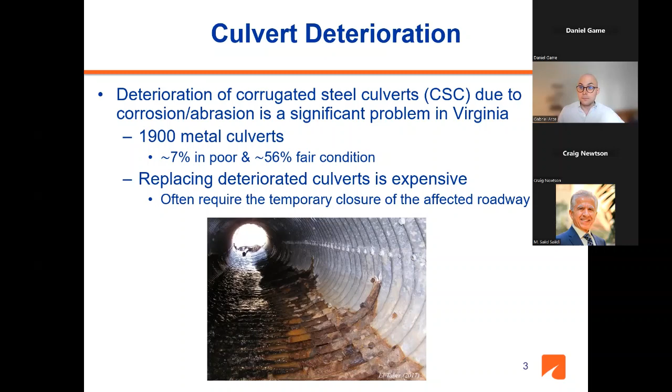This deterioration usually occurs because of corrosion of these culverts. These culverts are usually made out of galvanized steel, which gives some corrosion resistance. Nonetheless, over time, with the water, they corrode, and also because of the abrasion of not just the water, but all particles that go in this water, like gravel. If you want to replace these culverts, it's fairly expensive and often requires temporary closure of the affected roadway. This is a very significant problem for us here in Virginia, and very likely in many other states in the United States.

So how does this deterioration occur? At early stages, only limited damage occurs at the invert of the culvert. The invert is the bottom portion of the culvert, and that's the area where the water is always flowing, so it's more susceptible to damage. This is an image of one of the culverts here in Virginia with some minor deterioration of that bottom portion of the invert. Here you can see a zoomed-in picture of this deterioration. As you can see, you start losing a little bit of the surface of these culverts.

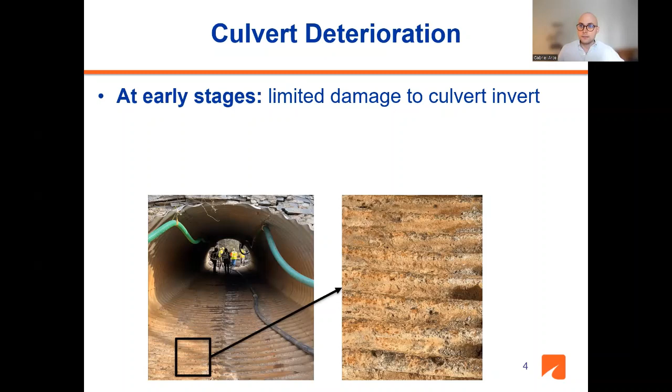Next, at later stages, if nothing is done, extensive damage can occur. This image is from research done by Peter and Moore, showing a culvert that was extracted from the field and then rotated so you could appreciate all that damage. As you can see, you have wall loss and perforations that occur, and the structural capacity of this culvert is significantly affected. So if we do not repair these culvert inverts, this damage can extend and can be very problematic.

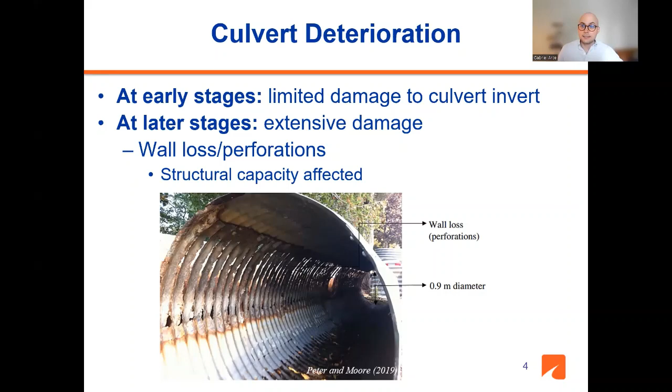Now regarding culvert invert repair: at early stages of deterioration, only minor damage of the invert occurs, so restorative maintenance at this point is possible and appropriate, to protect that invert from further corrosion and abrasion damage. At VDOT, some repairs were previously done, which consisted of pouring or paving that invert with a 4-inch thick layer of concrete reinforced with wire mesh. The 4-inch thickness and the wire mesh were used so that cracking could be prevented.

Because of course, if you have an invert repair with a concrete material that cracks, water can continue to flow through those cracks and then be in contact with the existing steel culvert and continue the corrosion, the rapid corrosion deterioration.

Now, the problem with this is that this is a very thick repair, these 4 inches, and that adversely affects the water flow capacity of this culvert. So this is not an optimum solution.

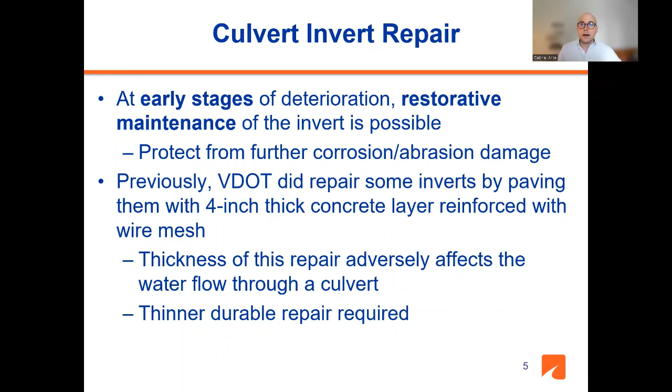Ultimately, what is necessary is a thinner, more durable repair for these inverts. Whenever we have more than just minor invert deterioration, but a more significant deterioration that requires structural repair, one interesting option for structural rehabilitation is the use of spray-applied pipe liners. These are rapid and cost-effective solutions using a cementitious mortar, usually fiber reinforced, that is centrifugally sprayed.

As you can see in this image, this is the culvert. You have the host metallic pipe, and you use this spinning head. You pump the concrete to that spinning head, and due to the rotation and centrifugal forces, the material is expelled to the surface of the host pipe, building a cementitious pipe inside of it. Usually a thickness of around 2 inches is used for these repairs.

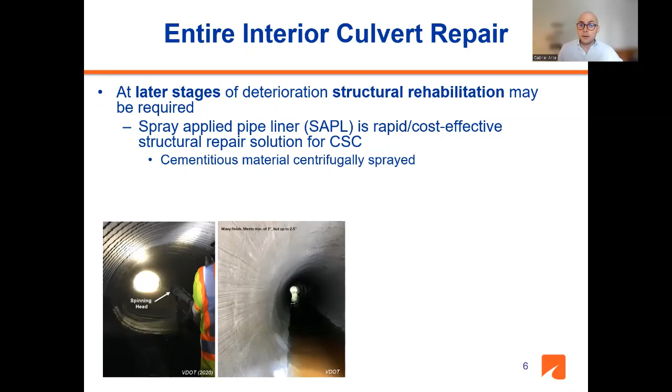This is an image of the repair being completed. And finally, this is another image of multiple culverts that were repaired using this technique.

This is me. I'm so sorry. Yeah, excuse me? Okay, so I'll continue.

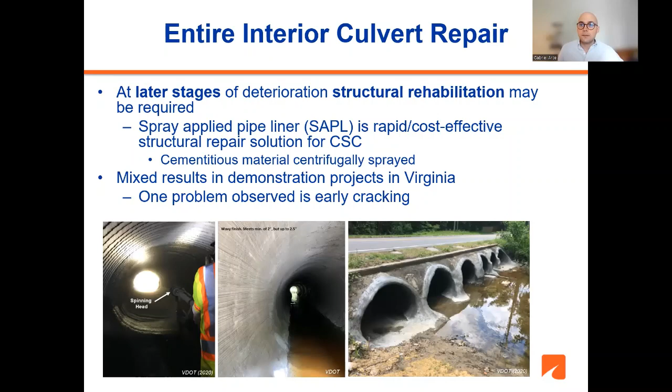This is a structural rehabilitation, so if you have cracking, it really matters what type of concrete you have there, what type of behavior this concrete has, because you need to hold that load carrying capacity. I'm going to talk more about that in the next slides, and why ECC, either for the invert repair or the entire culvert repair, is a very interesting solution.

So, okay, let's start with ECC for culvert repair and why we believe this is a very interesting solution.

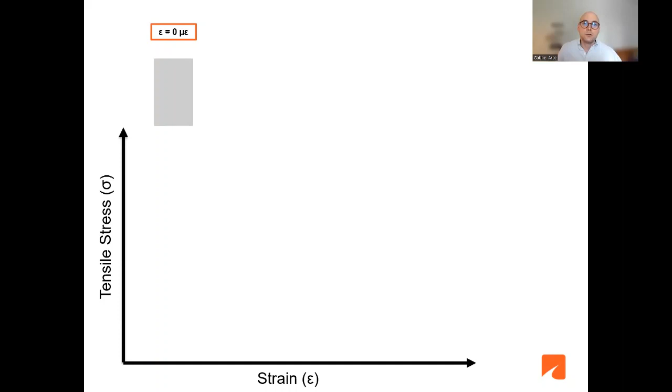You continue deforming the material - at 25 microstrain, the stress response is about 100 psi. You continue until suddenly, when you reach about 100 microstrain, which would produce about 400 psi of tensile stress in the concrete, the conventional concrete would crack.

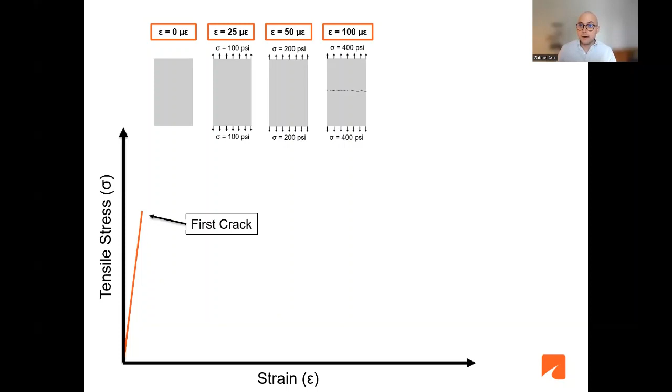Now, the question is, what happens after this crack? If it is a conventional concrete material without any fiber reinforcement, what is going to happen is a brittle, immediate failure of this material. Again, imagine the culvert repair, this structural repair - if the concrete material does not have any fibers and you have a crack, you know that concrete can no longer hold the load. This could be very problematic if the host metallic pipe further deteriorates to a point where the concrete material actually has to hold the load.

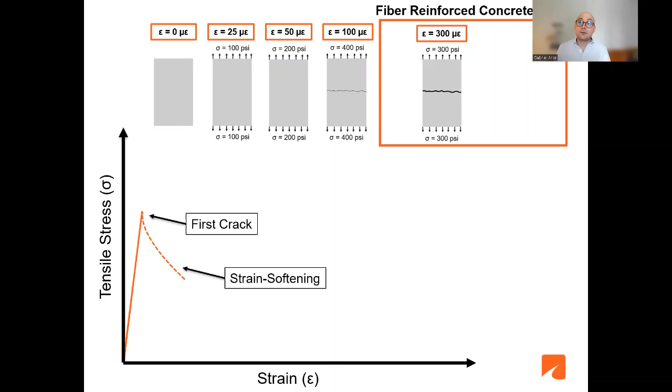Next, let's see what happens when we have fiber reinforced concrete. If we have a conventional fiber reinforced concrete, after this first crack, you're going to have a strain softening behavior, meaning that after that first crack, you have a residual load carrying capacity. Nonetheless, this capacity is lower than the original concrete material prior to cracking. If you continue deforming these materials, the load will continue to go down, and that crack will continue to open until finally you have a complete rupture of the material, a complete failure. It's important to notice that similar to conventional concrete, this fiber reinforced concrete, after the first crack, is already in a failure regime.

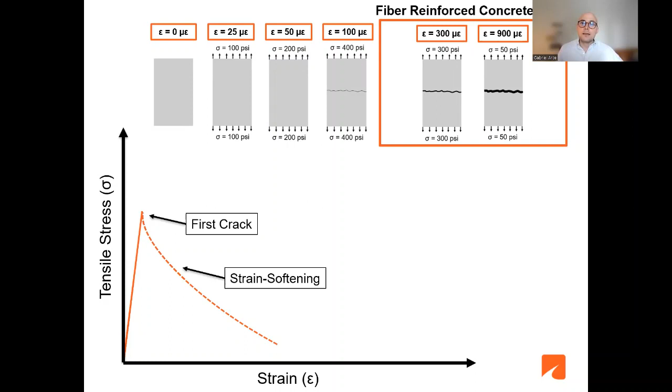That's why I have this as a plot with a dashed line. Now, interestingly, the ECC, engineered cementitious composite, behaves rather differently.

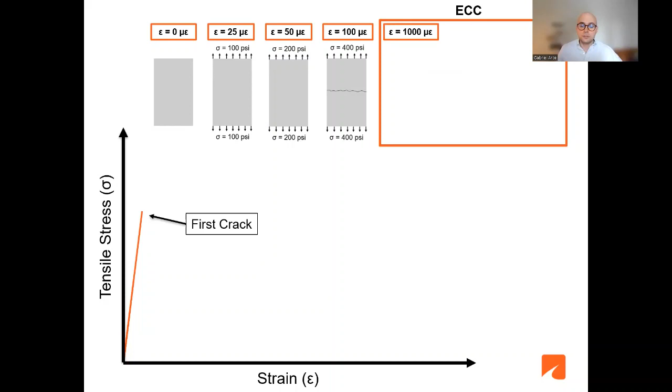So how does the ECC behave? After that first crack, you continue deforming the material, and you actually have a phenomenon called pseudo-strain hardening, meaning your material can hold more load after the crack.

How does this mechanism occur? It occurs through this process of multiple crack formation. This strain hardening is called pseudo-strain hardening, to be differentiated with the strain hardening observed in metals, which is based on the dislocation of atoms.

This strain hardening in this cementitious system occurs because of this phenomenon of multiple tight microcracks forming that allow this material to deform. It's important to mention that these cracks are very tight, and that's important for durability. Sometimes you can barely see these cracks with your eyes.

Now, interestingly, you continue deforming this ECC, and it continues producing more tiny cracks, and the load capacity continues to increase. Eventually, you reach a point in which the material fails. One of these multiple cracks will grow, and the material will fail, similar to a conventional fiber reinforced concrete.

But again, imagine the repair that we were talking about in the field for these culverts. If you have an ECC material, this is a very resilient repair, because even if you have some type of cracking, you know that these cracks are stronger than your original material prior to cracking, and it will be able to hold the load. So it's a very resilient system.

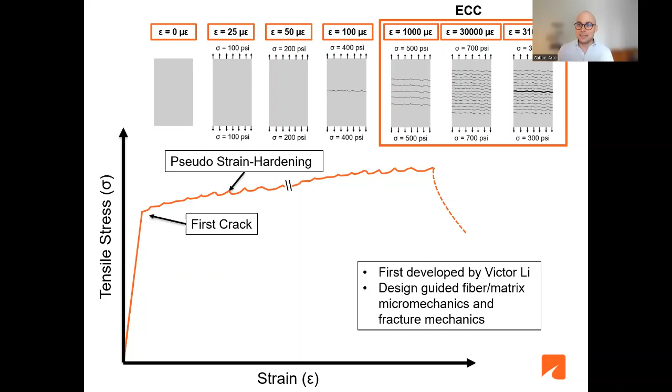These are very, very interesting systems. And I would like to go even more deep in the explanation of these concepts, but I think it's beyond the scope of this presentation today.

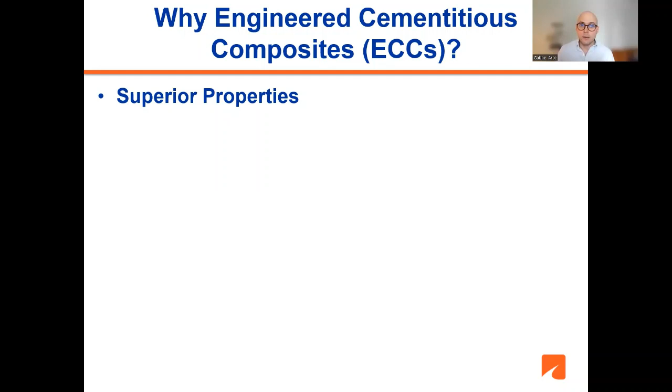How much is the ductility in tension? Usually about 200 to 800 times more than that of conventional fiber reinforced concrete, and about 5 to 20 times more tensile ductility than UHPC, which is a very popular material being used in repairs recently. Also, it has unmatched crack controllability.

Cracks in ECC are steady state controlled to usually less than 60 microns. Why is this very important? Because this allows these cracks to be self-healing.

Concrete has autogenous healing properties. However, these autogenous healing capabilities are usually effective only with tiny, tiny cracks. This range of crack size is appropriate for this healing. It has also been demonstrated through research that cracks around 50 to 100 microns do not increase the permeability of the cementitious system. So, in short, these cracks in ECC are not a problem for durability.

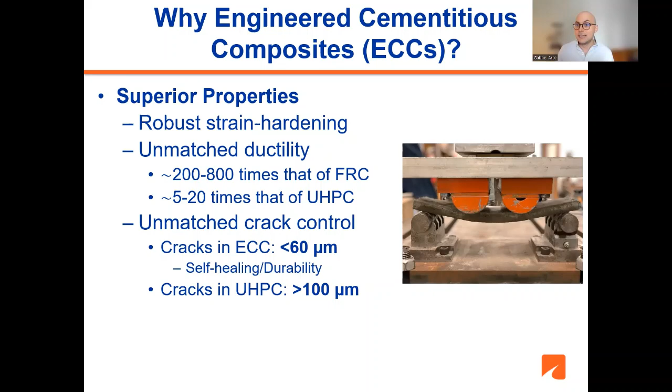Also, for context, cracks in UHPC, for instance, are usually greater than 100 microns. And in that case, if you have a UHPC with this type of cracking, you can actually increase the permeability of the system.

This is an image just to illustrate multiple cracking behavior in ECC. This is a section of one specimen that was tested in tension, 3 inch by 1 inch to give a sense of scale. And this is at failure. You can see all those cracks, how tight they are held together.

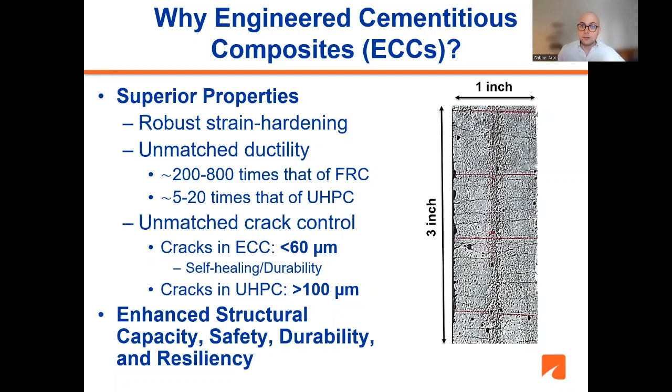So it's very interesting, this ECC material with regards to crack control. And ultimately, all this leads to an enhanced structural capacity, safety, durability, and resiliency of the systems that you repair with ECC. Now let's talk about the application of ECC for the culvert invert repair.

As I was mentioning in the beginning, when the deterioration is not that advanced, you can repair the invert in a restorative manner to prevent further deterioration. Previous work by Ozyildirim and Sharifi, colleagues of mine at VTRC, focused on the repair of only the invert with ECC. There's a technical report, VTRC 21-R5, which you can access online on the VTRC web page, and you can get all the details about this successful project.

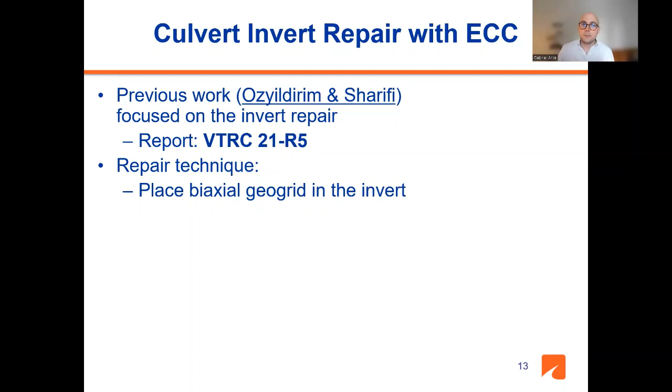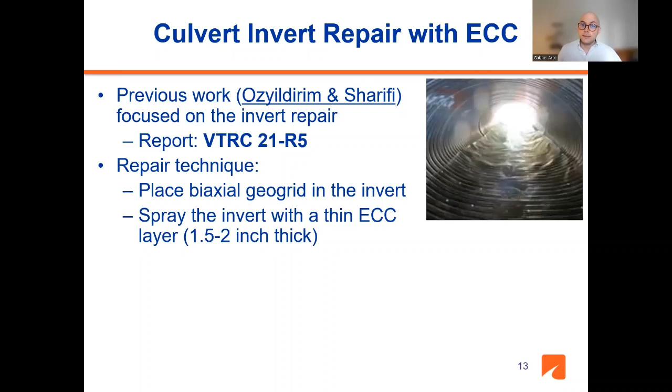In summary, what they developed is a repair technique for culvert inverts, where they started by placing a biaxial geogrid in the invert of the culvert. The purpose of this geogrid was first to allow the material to stay in place - the ECC is usually quite flowable - and also to provide some reinforcement because this is a very thin repair. After that, they sprayed the invert with a thin ECC layer, about 1.5 to 2 inches thick.

This is an image of the work of the repair of one of these inverts, and you can see the culvert there, you can see the geogrid, and you can see how the workers are spraying the ECC into that invert. And this is the finished product.

Now in this work, they completed 5 repairs successfully, and to date this was done 5 years ago, so all of these repairs are performing very, very well. Based on the success of this work, the VDOT guidelines on restorative maintenance and structural rehabilitation of existing culverts has implemented this method. You can see here part of this document, in which they detail precisely how this repair has to be done with the geogrid and the ECC.

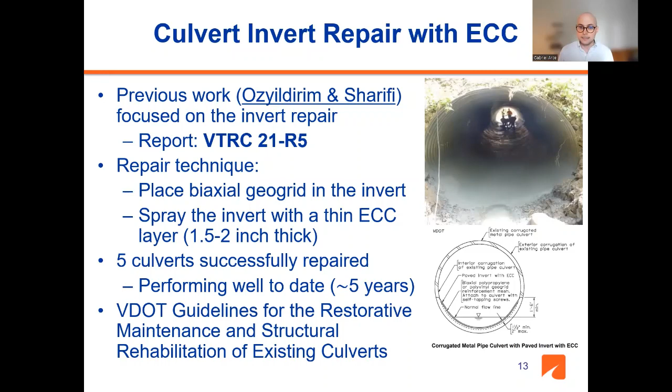Another interesting thing - we're now trying to update this repair technique to do the same, but without the geogrid, because the geogrid is an additional step which requires labor and cost of the material. This revised technique, which we actually tested for the very first time yesterday, is the same repair, but now we use an ECC material that has greater shape stability. It's a thicker type mix.

And you can see the image from yesterday's repair. We were able to successfully repair the invert without having to use the geogrid. Hopefully in the future I can tell you how it is performing, right? But so far, it has been a success.

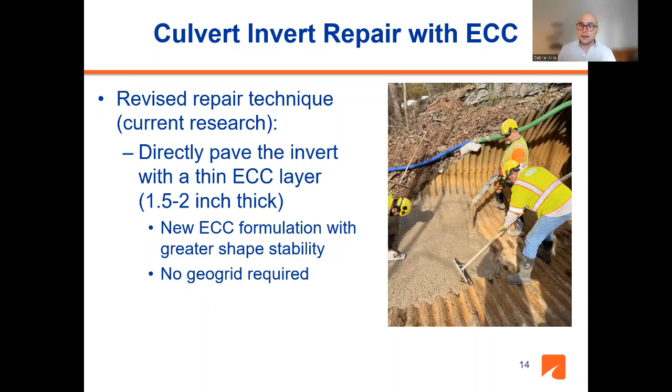Now, next I want to talk about research in progress, and this is particular to the repair of the entire interior culvert with ECC.

So first, I want to mention what the challenges are, because this is actually quite difficult. When you do the repair of the invert, gravity in a way is your friend to hold the system in place, right? But when you want to do the entire culvert, especially when you are spraying into the top of the culvert, gravity will try to pull this material down. And it's difficult to be able to generate that thickness buildup.

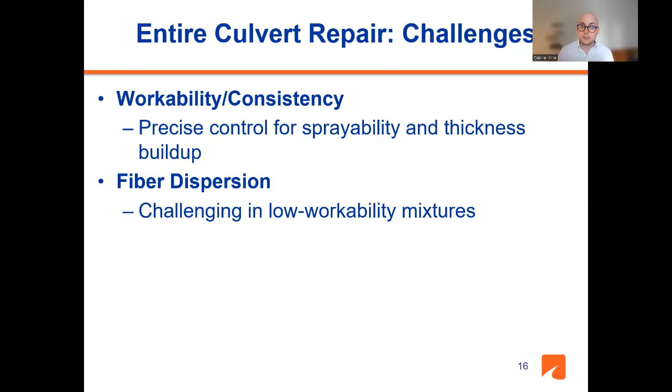So one of the challenges is having to change the workability of this ECC. First, to be able to successfully spray it, you need sufficient workability, but then it has to have the rheological properties to produce that thickness buildup as you're spraying, especially when you spray overhead. Then fiber dispersion is challenging because these mixtures are very low workability mixtures, so it's very difficult to disperse the ECC fibers in these mixtures.

Practicality and cost is also an issue, especially with these repairs that we want to implement widely in the field. Some components of traditional ECCs are expensive and impractical. One example is the type of sand that is used - ECCs don't use coarse aggregate, only sand, and the sand used is usually a very fine particle sand.

It's a microsilica sand, which is very expensive and just not widely available. So we need to find alternatives to that. So how are we trying to address that with the research in progress?

We have a new research project that started about 6 months ago that is exploring this. We are testing some high performance fibers: PVA, which is a traditional fiber used in ECCs, and also ultra high molecular weight polyethylene fiber.

Just to give you a flavor for the properties of these materials, the PVA fiber typically used for ECC has a length of 8 millimeters, a diameter of 38 microns, and an aspect ratio of about 211. The tensile strength is comparable to that of steel fibers, with a specific gravity of about 1.3.

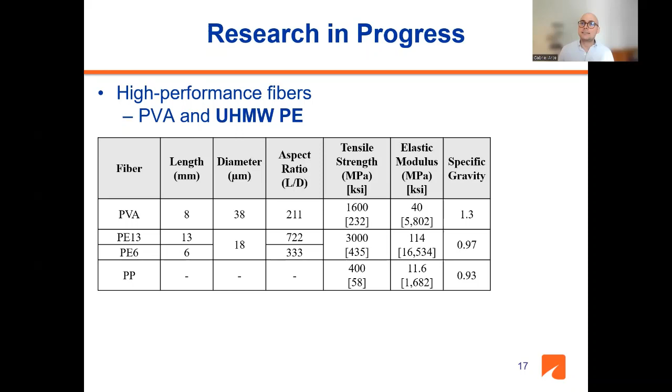There are some special types of polypropylene fibers, specifically high tenacity polypropylene fibers, that have been used in ECCs, but these are not the ones that are often used in the field.

Another thing that we're doing in this research is optimizing the mixture's rheology. So we're using a rheometer for this purpose to scientifically study the flow of this material, the plastic viscosity, yield stress, and thixotropy, which are important properties for this spray material.

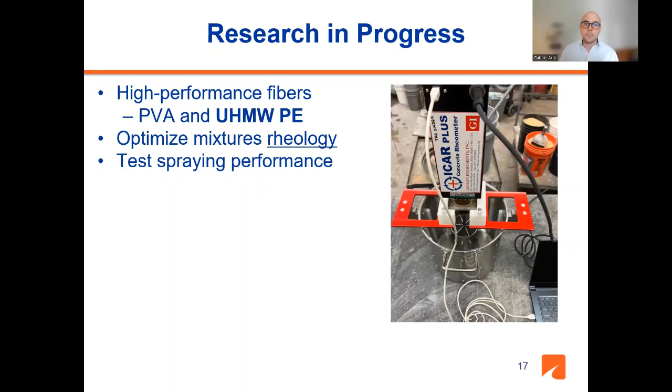We're trying to test spray performance. We have a new spray system that hopefully is going to help us test how these materials spray in the lab.

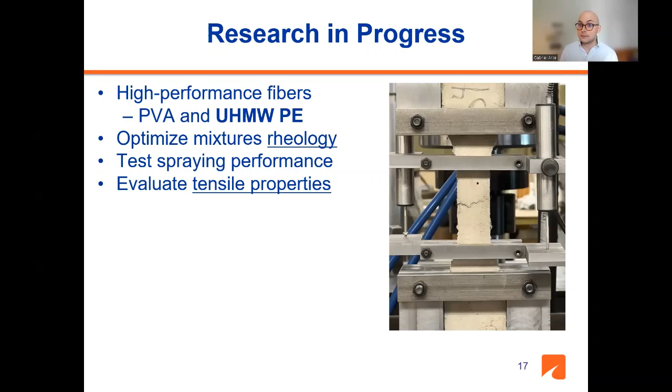Also, we evaluate tensile properties, and I'm showing this test because it's not a very conventional test that is used. This is a uniaxial tensile test, based on guidelines of the Japan Society of Civil Engineers. From this test you can obtain all the relevant properties of the ECCs: you can measure the elastic modulus, the first cracking, evaluate the strain hardening behavior, and obtain all the relevant properties of your ECCs.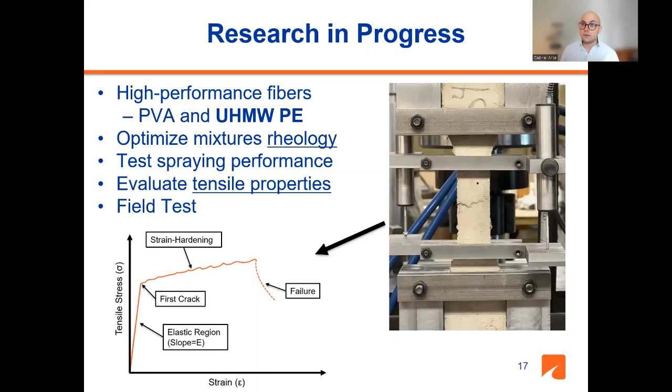And finally, we're going to do field tests of this technology and hopefully successfully repair some of these culverts.

Also, I wanted to give you a little bit of an idea of how these ECC mixtures look like. Again, this is ongoing research, but the mixtures I'm about to present are some of the mixtures that so far are looking promising for our application.

These mixtures, the materials that we're using, are type 1-2 ordinary Portland cement, fly ash, and silica fume. The water to binder ratio is about 0.28. The fly ash content is 55% replacement of cement. Silica fume, we use at 10% replacement of cement. And then the aggregate that we use is regular concrete sand instead of using this microsilica sand.

This is very important because usually for these ECCs you want very fine particles because that helps in this pseudo-strain hardening behavior. Nonetheless, we are trying to implement materials that are readily available in Virginia. The sand to binder ratio that we're using is 0.36, which is very normal for these ECC materials.

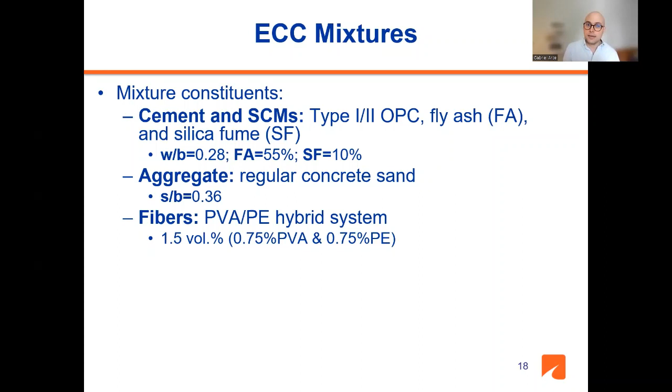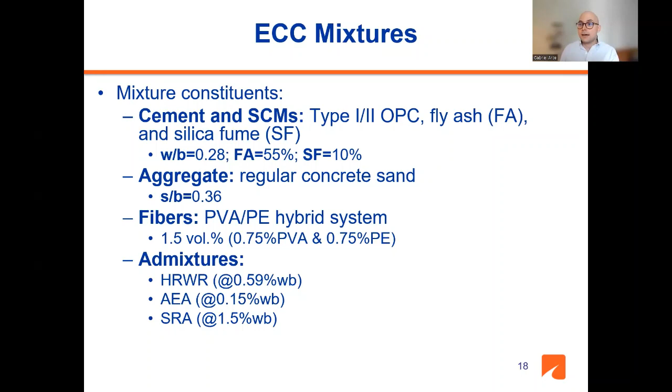Fibers that we're using: PVA and PE. For these particular mixtures that I'm going to show you, these are hybrid systems of PVA and PE fiber at 1.5 volume percent total, distributed as 50% PVA and 50% PE fiber. Admixtures that we use: high range water reducer, air entrainment admixture, and also we have tested the use of shrinkage reducing admixture.

Next, I'm going to show the properties of these two materials, which are very promising for the application we're looking for. The density, as you can see, is very low—these are very light materials. Nonetheless, the compressive strength is sufficient, about 6,500 psi.

Regarding the permeability of these materials, we want a system that is impervious, so water cannot continue to penetrate through this cementitious repair and corrode the host metallic pipe. As you can see, the surface resistivity is quite high, so this falls in the category of very low chloride ion penetrability. The rapid chloride permeability test results are about 1,000 coulombs for these materials, so again, very low permeability systems.

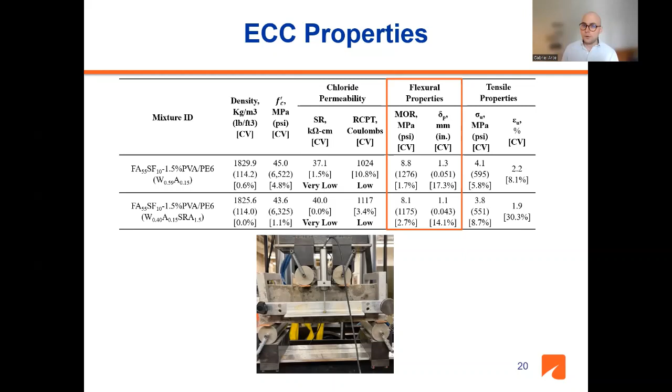Regarding the flexural properties, this is based on ASTM C1609, and I'm showing the picture below of the test. The flexural strength of these materials is about 8.8 megapascal for the one without the SRA, roughly 2 times the flexural strength of conventional concrete. Also reported there is the deflection capacity of these materials.

Finally, we have the tensile properties of these systems, around 4 megapascal strength in tension. The tensile strain capacity shown there is about 2% tensile strain. It's important to mention that for a material to be designated ECC, it has to exhibit at least 2% tensile ductility, so these materials are right there in that range.

For illustration, I'm showing the test results for the material without the SRA admixture. These are 3 specimens that were tested for each case. You can see the strain hardening behavior I was talking about, with all these multiple peaks, which represent all the tiny cracks generated in the process of damaging this specimen.

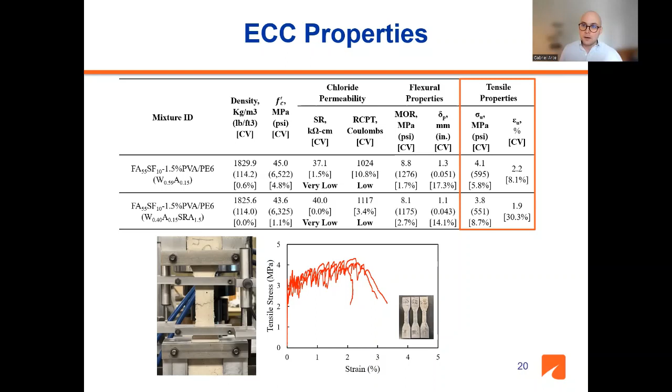An interesting thing about the shrinkage reducing admixture—we're not only using it for the purpose of reducing shrinkage, but we've also found that this admixture helps with the distribution of the fibers. We don't really understand the mechanism of action, but when we use the SRA, it helped us better prevent fiber clumping in these systems.

So again, I wanted to present not just the mixture proportions of these materials, but also some of the properties, to give you a flavor for how these ECCs perform and what they're made of. With this, I am going to conclude my presentation, and if you have any questions, I'll be happy to answer them when it's time. Thank you very much.

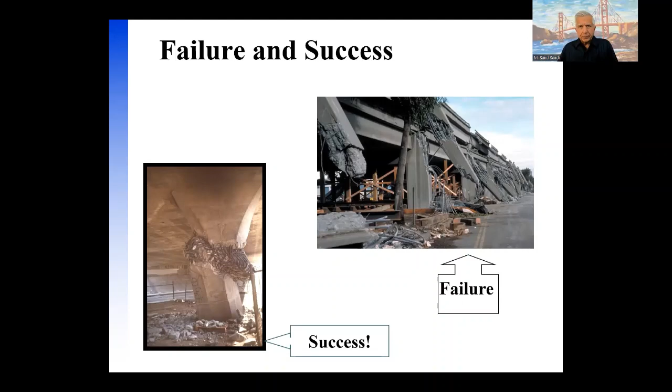Now, what is earthquake damage? What is it that we have in bridges subjected to strong earthquakes? Essentially, there are two types of damage. One is a plastic hinge damage that you see on the left side of this slide, and that's the most critical part of the columns under seismic loading.

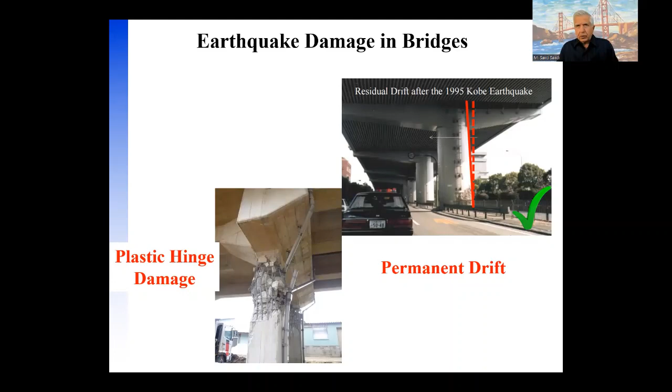Another issue is the permanent drift. The photo on the right side shows a permanent drift of a viaduct in Japan. A lot of these bridges were torn down after the earthquake because of the permanent drift that they had, and they were not considered to be safe.

So let's talk about the cause of plastic hinge damage. First, the issue is the low ductility of unconfined concrete. Concrete by itself is a relatively brittle material, so it does not have much tensile strength, and it fails.

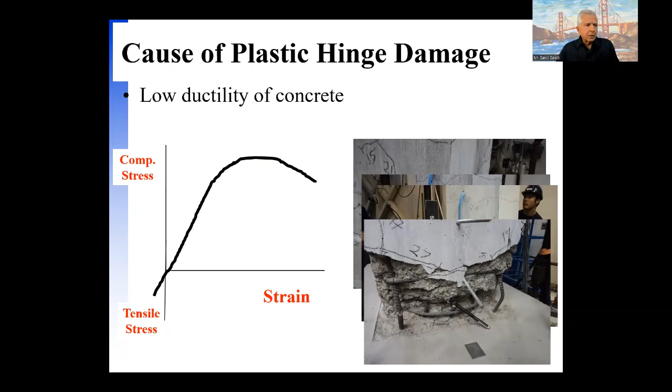Because of that, under seismic loading, if we take a column and look at the plastic hinge, as we increase the seismic loading intensity, we get cracks and begin to spall the concrete. As the intensity increases, we have more and more spalling, exposed reinforcement, and eventually we rupture some of the reinforcement. The concrete has completely fallen apart in the plastic hinge.

Now, how about permanent drift? What's causing it? The primary source of permanent drift in bridges under seismic loads is the fact that when the steel yields, it ends up with a permanent strain.

The strain diagram on the left side for steel shows a linear part, then the yield plateau, then strain hardening. But once the stress is removed, you end up with a permanent strain, and that permanent strain is the primary source of permanent deformation in bridges after the earthquake that we see.

Now, we came across a new material, shape memory alloy, a super elastic shape memory alloy specifically, where the stress strain diagram is a little different than what we have for steel. We get a flag shape response, meaning the behavior looks similar to steel initially, with a linear part, then yielding and strain hardening.

Then once we begin to remove the stress, the path that the stress strain diagram follows is the shape of a flag. By the time the stress gets to zero, the strain also gets to zero, or near zero, but in the idealized way, it's zero. So you can dissipate some energy here, and yet not have permanent strain.

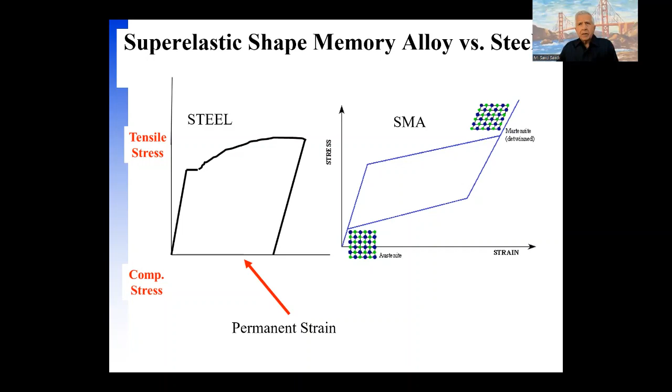So then the question is, why not combine these two materials, the ECC and the SMA? Now, I realized that the speaker before me was going to tell you about ECC in a lot of detail, so I did not.

I'm not going to get into that, it's already covered. It basically is a grout that's got sand in it.

So the material was new to us in the way of research. We said, okay, we are going to try to learn about this material first in our application. So we began to crawl. The work began with crawling on this subject, and we built some specimens, tensile, flexural, compressive, and we decided to use that in the repair of a column, a large-scale column that we had tested on a shake table with shape memory alloys in the plastic hinge.

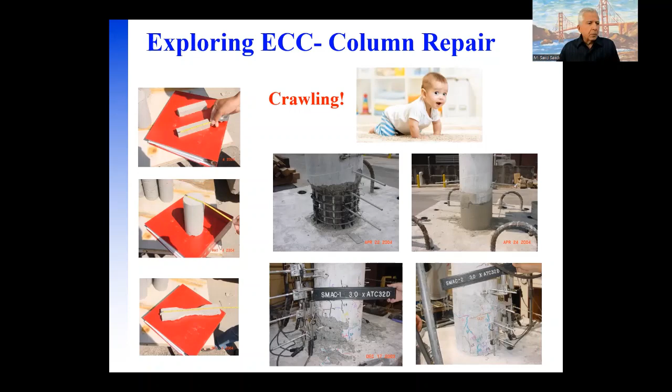So you notice in this one, we have some surface cracks that we observed here, but nothing like what we have on the other one. So if you go to a bridge site and you see this condition, you say, well, actually, we don't need to close this bridge to traffic. So it became very attractive. Definitely, through that crawling, we learned that this material definitely has potential.

So then we began to walk by saying, okay, let's just build some more columns and test these. These are 3 columns that we studied, again, under cyclic loading. The one on the left side is conventional steel and concrete. The one in the middle has shape memory alloys and concrete, but here we did not use ECC. The one on the right side, we used ECC and SMA. Again, the damage is substantially less than what you see in the conventional concrete. We were convinced that ECC is very effective in controlling the damage.

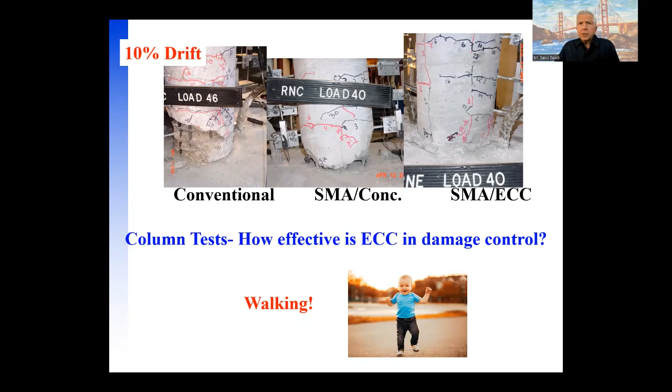Now you say, well, the basic attractive characteristic of ECC is its tensile strain capacity, but that tensile strain capacity prevents damage in the cementitious material, even under compression. So when we have cyclic loading, we see that advantage here. In the way of force displacement or force drift ratio, which is a measure of how successful a design works, we saw that, well, in both cases, we did have good performance in terms of dissipating the earthquake energy.

So a well-designed conventional column exhibits the picture that you see on the left side. This is what we measured in our column test. The one on the right is the one that has ECC and shape memory alloy. Again, a great deal of energy dissipation, but that flag shape response of shape memory alloy that I mentioned is maintained. Now, if we look at the residual drift, remember one of the damage types that we try to control was to control residual drift.

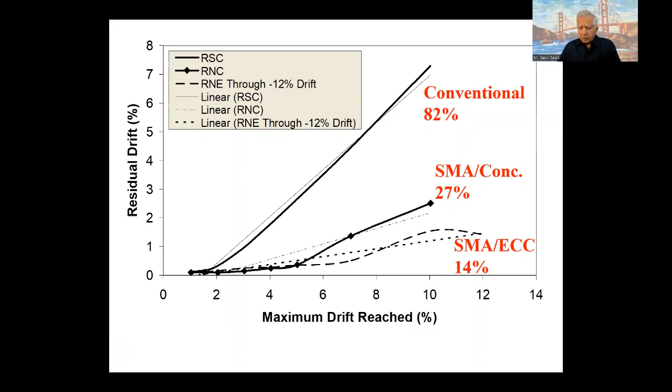So if I show residual drift on the vertical axis and the maximum drift on the horizontal axis, a conventional column exhibits very high residual drift. When we combine SMA and ECC, we notice that residual drift drops by a factor of 6. This is about 1/6 of the conventional column. But the one that has only SMA without ECC is somewhere in between. Still, shape memory alloy brings the column back, but the fact that we didn't have ECC in that column still contributed indirectly to residual drift. In other words, ECC was the solution here. We kept walking.

We kept walking by saying, okay, what if we use ECC in segmental columns, again for seismic loads, because this is attractive for accelerated bridge construction. Here you notice a conventional concrete segmental column versus ECC. You see quite a bit of damage in the conventional column, but the damage in the one using ECC in the segments was a lot less and certainly easier to repair.

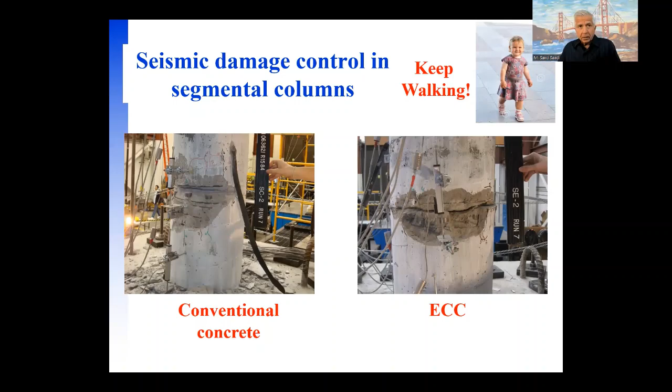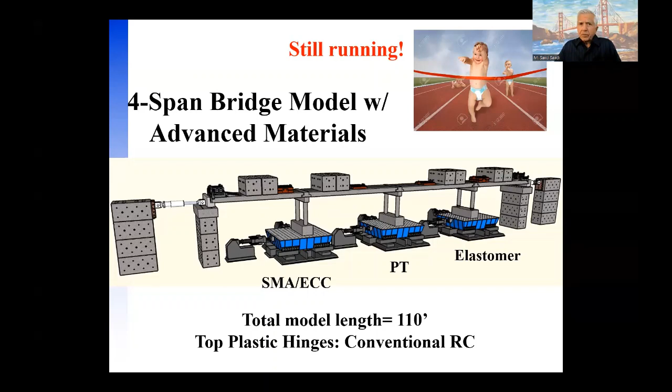Then we decided to keep running, but this time applied that to a 4-span bridge. This was a 110-foot bridge model that we tested on shake tables at the University of Nevada, Reno. We had a variety of details at the different columns, but I'm going to focus on the one where we had ECC and conventional concrete on the same column. This is the shake table testing of this bridge.

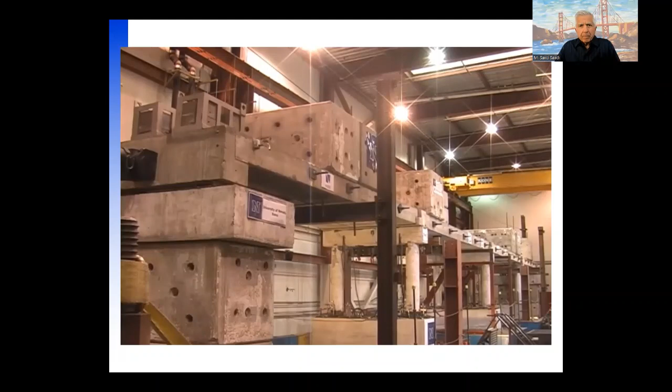Most of the earthquake tests we did here were bi-directional, and the bottom of the column was subjected to bidirectional flexure, whereas the top was essentially subjected to unidirectional flexure. Despite that, I'm showing you pictures of a column where at the top we have conventional reinforced concrete, and at the bottom we had ECC. So even though we had harsher loading on the ECC one, again we saw better performance.

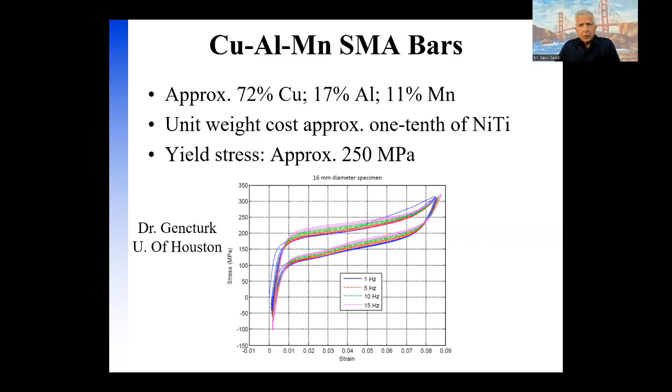Having been convinced that ECC could work well in controlling seismic damage, and considering the relatively high cost of the first type of shape memory alloy we used, nickel titanium, we decided to look at alternative shape memory alloys. This one made with copper, aluminum, and manganese is a lot less expensive than nickel titanium, has lower strength. There were preliminary tests showing good potential for this material, so we decided to adopt it in one of our projects, using copper shape memory alloy in combination with ECC again, and built a large-scale column model tested on a shake table.

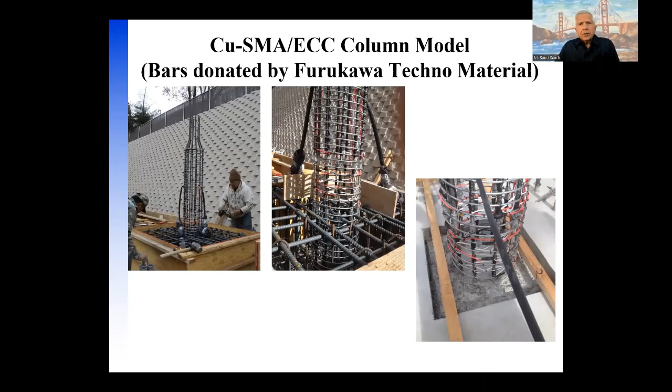So the flying came with implementation of SMA ECC in a showcase bridge in Seattle, Washington. This was a project that partial funding was provided by the Federal Highway Administration through their IBRD program, and the Washington Department of Transportation. Their vision and interest in adopting new technologies and implementing it was really admirable, and we really enjoyed being able to be part of this and seeing this project.

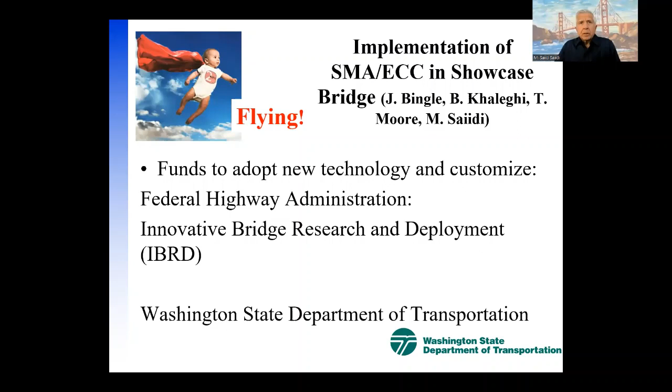This concept was implemented in the SR-99 off-ramp bridge in downtown Seattle as part of the Alaska Way viaduct replacement. The bridge is a three-span bridge, 180 feet the central span, and 110 feet on the sides. Then this precast box, post-tension spliced tub girder had single column piers. The columns were 5 by 5 square, but they had a round core.

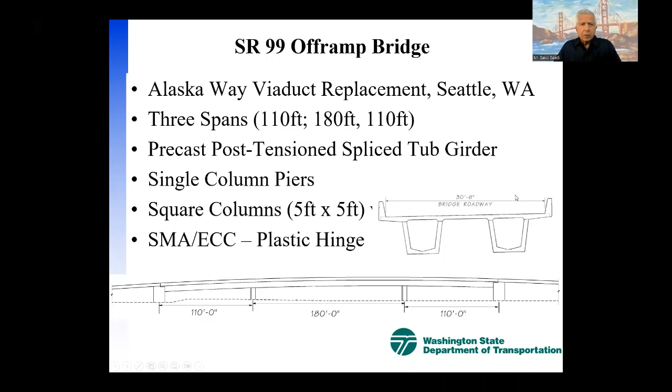And in the plastic hinges of these columns, we used shape memory alloy combined with ECC, because by then our comfort level was way up there.

Now there were a couple of additional work that we did, the research we did before we actually implemented that. First of all, in previous projects, we had changed the nickel titanium into a dog bone shape, and we put it in columns. But we said, well, what if we don't do that? What if we use a different kind of couplers, headed rebar couplers, at the bottom. This way, we don't have to shave away a very expensive material.

Nickel titanium is very expensive, so we're going to make full use of the cross-section used in this material. Another thing, given the fact that SMA nickel titanium is expensive, what if we shorten this? Can we still get good response? So we did some optimization essentially for this project before it was implemented in the bridge.

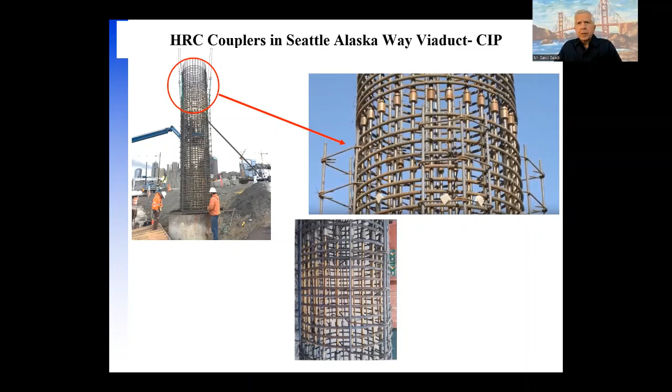Here you see the picture of the column cage with nickel titanium bars at the top, and you clearly see the headed bar couplers at the top, and we had them at the bottom, because we don't need to use these SMAs over the entire length of the column, only in the plastic hinge. So in the plastic hinge, this is where we have the SMA bars connected to steel bars at the top and the bottom. This bridge was completed and opened to traffic February 2019, about 4 years ago. So it's out there.

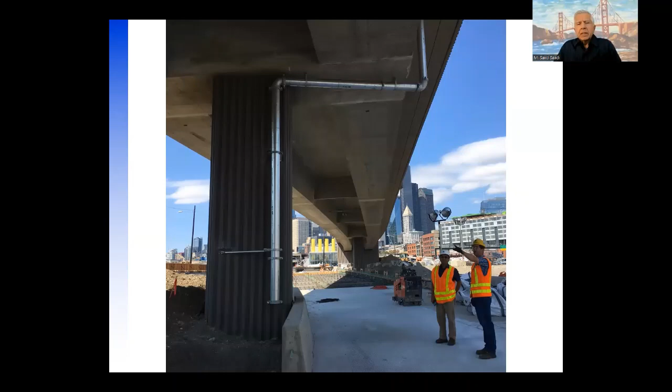Now, we are continuing our work through a current project. It's a pool-funded project led by Federal Highway Administration and Washington Department of Transportation. We're in the first phase of it, looking at a variety of shape memory alloys, including copper-based shape memory alloy because of its lower cost. There are a new generation of nickel titanium bars that are coming, some are stronger, therefore we can reduce the amount. Also, an iron-based shape memory alloy that we are also exploring.

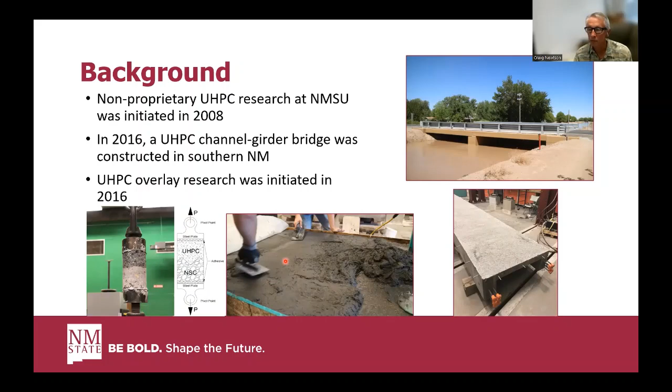And then in year 3, well, year 2 was another bonded UHPC project, basically looking at shear keys between channel girders, trying to keep them bonded. And then year 3 was the field implementation project for the bridge in Socorro.

Originally the overlay was supposed to be placed in 2019. That got delayed due to issues related to letting the project. So it got rescheduled for 2020, and then the contractor ran into delays on other parts of the project. It was actually 2021, late spring, April, by the time we actually got the overlay installed.

So the bridge is located at exit 150 on I-25 in Socorro, New Mexico. This is the major interchange in Socorro. The superstructure is a multi-cell box girder. It's got 2 lanes of traffic on top of it, and there is a low median between the 2 lanes of traffic. The total length of this bridge, I'm going to say approximately 300 feet. I believe it was 302, if I remember the numbers correctly from the drawing.

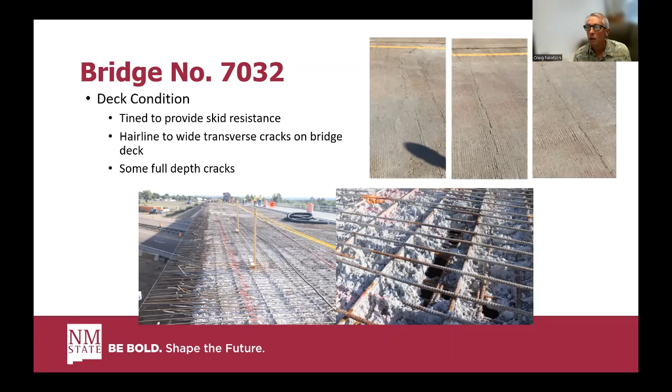There was also some work to extend the deck horizontally, laterally, which really doesn't play into the project as we performed it.

So for the UHPC mixture, we submitted a mixture to NMDOT for the project. The key point here was that we wanted a mixture that was thixotropic. There were some slopes on this bridge that were 7%. And when you put the UHPC down on that surface, you don't want it to run by itself. You don't want a self-consolidating concrete type mixture, but you do want it to flow once you provide some excitation. So it should be stiff enough to hold its form until you hit it with a vibrator, and as soon as you touch it with the vibrator, it should flow readily.

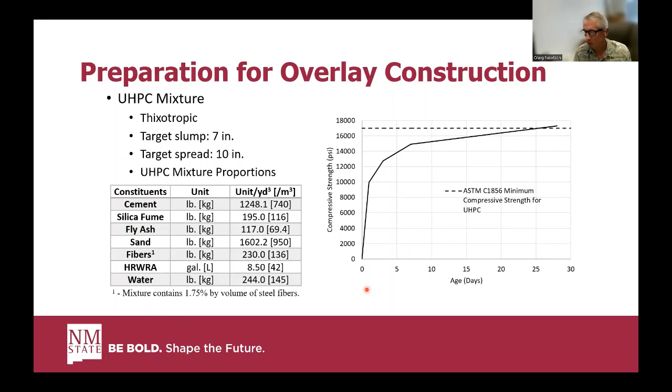We got the properties that we wanted with the mix design there. Target slump was 7 inches, target spread was 10 inches. We had the ingredients down here in the mix design, and basically what we were targeting was minimum strength for UHPC, 17,000 psi, and our mix was at like 17,320 psi. So we had a mix design that was functional for us.

We then went to, well, the project was let, and during the letting process it was decided to enforce Buy America, which kind of forced us to change our steel fibers. Our steel fibers had at one point been produced in the United States, but that plant had shut down. The fibers that we wanted to use were now produced in China. Those were not going to be allowed, so we needed to perform some work to come up with a different fiber. In our case, Brad Weldon had an old mix design that he pulled out with a different fiber that was produced in the United States, and that was the fiber that we used as the replacement.

The contractor got the bid, and the contractor was a contractor who had never done UHPC work before, but as part of the contract, NMDOT required that a mock placement be performed prior to construction so that the contractor would demonstrate proficiency in basically everything that needed to be done for the project.

As the time for the mock placement approached, NMSU offered to work with the contractor to get them prepared for it. They declined that offer. So when we showed up for the first mock placement, we basically spent that day working with the contractor about how to batch UHPC.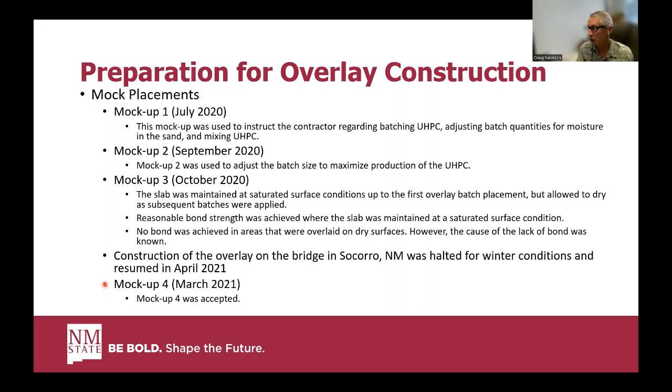After that, it was just a matter of keeping it saturated, and on the job site, the contractor actually did a really nice job. Every placement, the contractor did a really nice job of keeping the substrate saturated, the HPD layer saturated.

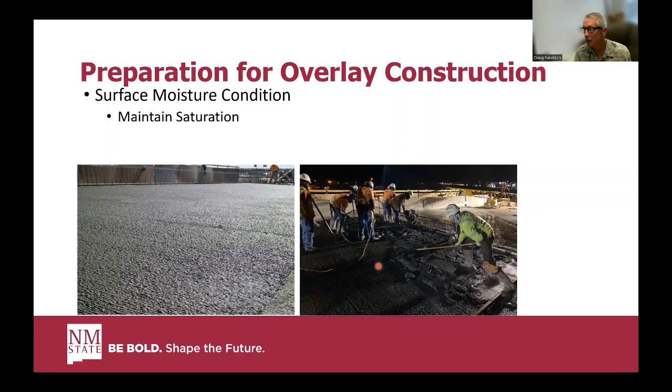Construction began in one corner of the bridge, and once construction started, for the most part, that progress was good. There was an issue at the very beginning with some ponding, but aside from that, it went smoothly for the most part.

There were 105 batches of UHPC produced. Each one of those batches was a little bit more than 3/4 of a cubic yard, so 0.77 cubic yards, which kind of gives you an indication of how big the project was - a 1-inch overlay for basically 300 feet in each direction.

We ended up rejecting 7 batches, and I guess at this point it's worth pointing out that we specified the mix design, so it was a prescriptive specification. NMDOT made that choice feeling like they had to on a pilot project with non-proprietary UHPC, because the contractors wouldn't be able to come up with a mix design on their own that would facilitate a performance specification.

Since the mix was prescribed, the money for those 7 rejected batches came out of NMDOT's pockets, and it was NMSU doing the testing on site that rejected those batches. So when we rejected those batches, we were acting as agents of NMDOT, and NMDOT had the liability for paying for that concrete. It's just the nature of a pilot project, an implementation project - not what you would want to see long term, but it certainly served the purpose that we needed it to serve at the time.

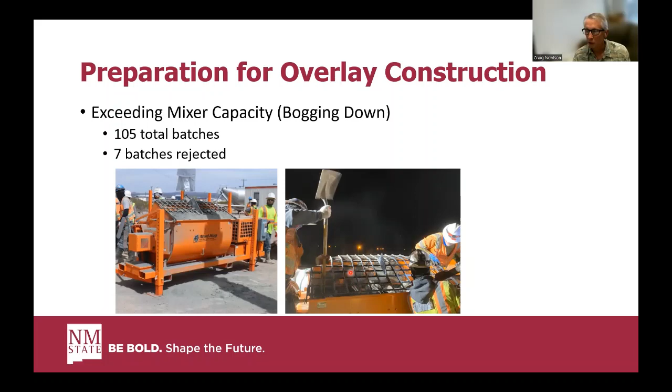Yeah, that's an OSHA picture right there. Put the shovel in moving equipment.

They basically set the mixers up at one end of the job site and then placed concrete from the far end toward the mixers as the pour progressed.

At the very beginning of the first placement, there was a ponding issue, a little bit of excess water. It was a small area, maybe 100 square feet total. In testing after construction, we actually don't see any issues in that area - everything looks great, but there was some concern. Basically what they had was a hose that was leaking and running down and ponding at the low end of the pour.

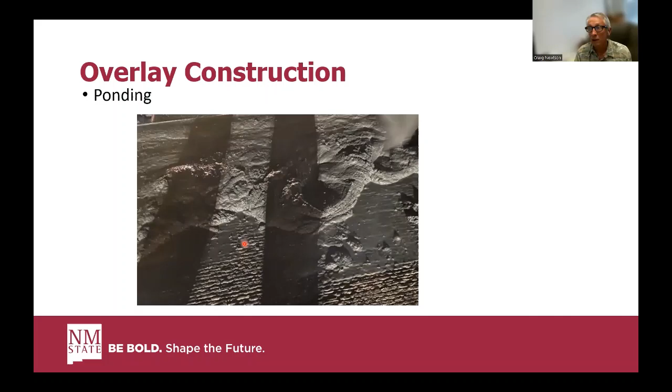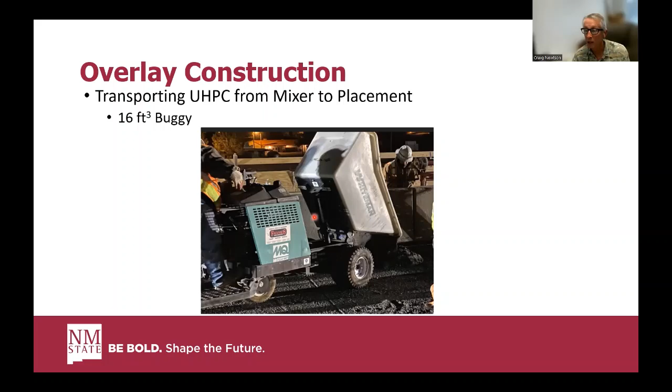This area right behind the screed is the area that was kind of important to us. When things went well, there was curing compound getting sprayed right behind the screed to control moisture loss, and then right behind the curing compound application, we wanted to get plastic down. When that happened, things went well. At the very beginning of the placement, that wasn't happening.

We placed the overlay in 4 placements. The first placement, probably the first half of it, the plastic wasn't getting down fast enough behind the curing compound, and there was cracking in that region - I would call that cracking moderate. But I'll show you a picture of it shortly.

When it went well, the curing compound was going down right behind the screed, and the plastic was getting put down no more than a handful of minutes behind the curing compound. When that happened, everything went well. At worst, we got isolated cracking - you could walk several yards of the deck before you could actually find a crack. So things went well when this practice was incorporated.

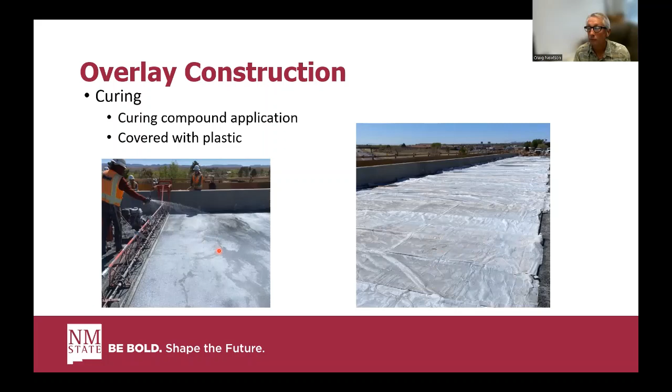The original contract called for a continuous placement from one end of the bridge to the other, no construction joints. The NMDOT did not want the joint, and specified that in the contract. The problem is that there will almost always arise a situation where you actually have to install a construction joint, and you better have a plan. Well, you should have a plan.

In this case, there was no plan for where to put it once we realized that the contractor just didn't have enough material to finish the eastbound lane on the first placement. So it was a discussion on the job site: do you want it above the support in a negative moment region where the joint's going to open? Do you want it in a positive moment region where it should have some compression? Or do you want it just a few feet off of the pier cap so that you can have it near an inflection point?

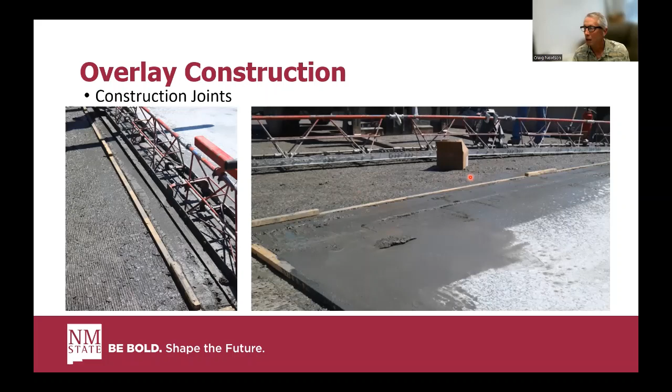In the end, we chose something near the inflection point, just to try to make it stress neutral. But when you're doing this and it's the middle of the night and you're not going to get anybody from the bridge design group on the phone to see what they want, that was really the issue. It would have just been more comfortable for everyone had there been a plan ahead of time.

So at the end of the project, we came back and looked at bond strengths, basically performed some thermal imaging to try to identify where some delaminations might be, if there were any. We also used chain drags. That's the lower tech thing, not nearly as attractive as the color photos from the thermal imaging, although the lower tech stuff is oftentimes more useful.

There were 4 places where we felt that there might be delamination. When we did pull-off tests, we looked at 2 of those locations, the first and the fourth. The fourth actually was delaminated, and that particular area was like a 2 foot by 2 foot section, so about 4 square feet that was delaminated. Area number 1 didn't meet minimum strength, but it was not 0 strength. It was not completely debonded at that location.

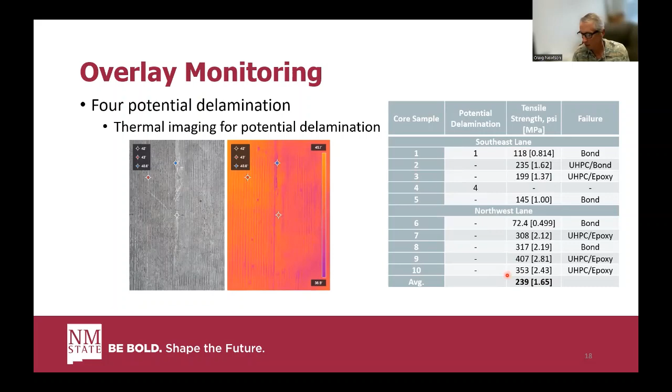When we look at the average strengths, we were happy with what we got there in terms of the bond strength between the UHPC overlay and the substrate. So by and large, it looked good.

In terms of lessons learned, the first piece of advice that I would give anybody is start small. This bridge in particular required greater capacity than the contractor had. So the idea of doing the entire eastbound lane in one continuous pour exceeded their labor capacity and exceeded the materials capacity that they prepped prior to construction.

Doing something smaller would have facilitated a little bit more control over things like not having a construction joint.

Second thing is start with a more robust mix design. We had a very lean mix design. We had really put a lot of work into trying to optimize sustainability and low cost, so that we drove our strengths down to just above 17,000 PSI. Then when we enforced Buy America and had to change our fibers, it required more work than it should have. If I could go back and change something, we would have started with a more robust mix design so that changes like that wouldn't have so much of an effect.

Number 3 is try to avoid prescriptive specifications. Honestly, at this point, I would say there's no reason not to just go to performance-based specifications. When we do our non-proprietary mix designs, we make them publicly available. We don't consider them to be our property at all. We publish them, we consider them to be freely available. Any contractor can look at them and work up their own mix design with their local materials, wherever they are. There's no reason why performance specifications can't be used at this point, in my opinion, for non-proprietary UHPC.